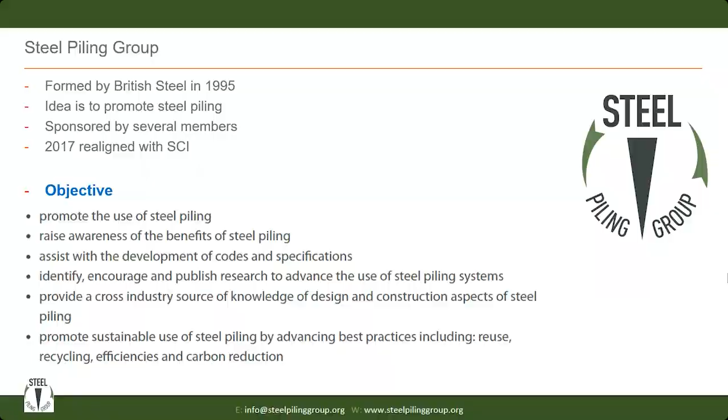Now, on the website, you'll find 6 guidance notes. These are really helpful, practical, down-to-earth guidance notes on topics that are frequently cause for questions. The Steel Piling Group has 13 sponsors, who might be plant manufacturers, material suppliers, or contractors, and we're grateful for the sponsorship of this group.

I'll just finish off by showing you a couple of our recent publications. P308, Specifier's Guide to Steel Piling, is our newest publication from last year, giving a very broad overview of essential topics to do with steel piling. Broadly speaking, our webinar today will be based on the topics covered in this publication, and you've got a free copy. The other publication is an earlier one, Durability of Steel Piles, which came out in 2019 and gives the latest understanding and guidance on how to be confident in the durability of steel piling. That is also freely downloadable from the Steel Piling Group website.

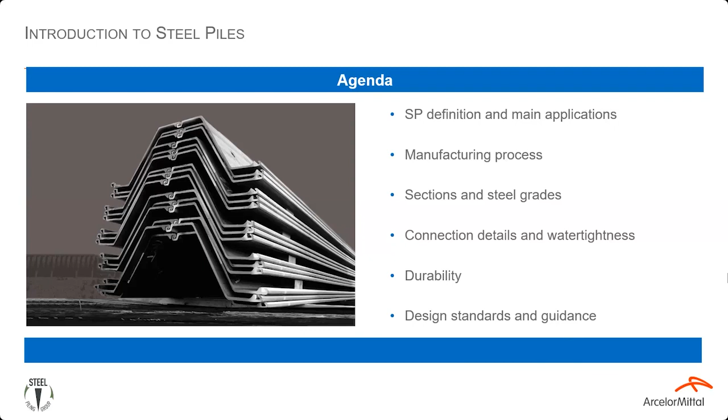So if we have a look at our topics for today, we'll look at what a steel pile is, how we make them, and a couple of steel grades and how we make those as well, and some connection details. We'll talk about durability, and I'll give you some information on design standards as well.

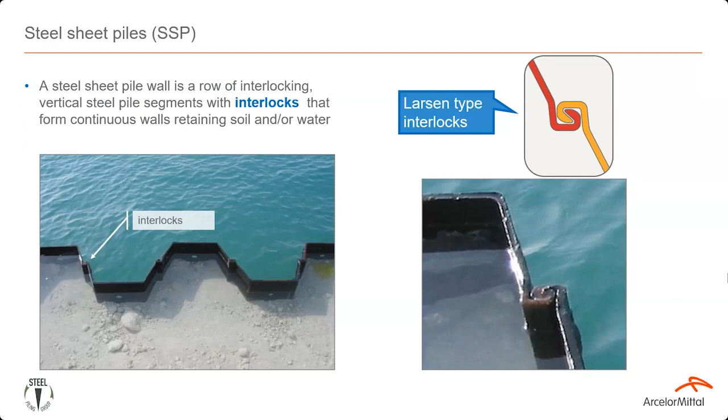So what is a sheet pile wall? It is simply the vertical interlocking of sheet pile segments. If we're looking at hot rolled sheet piles, these conform to EN 10248 standards, where the interlocks are key. These are fully formed, so when you connect the piles together, the wall will act as a single unit, such that shear can transfer across the wall. This is what we define as a structural wall.

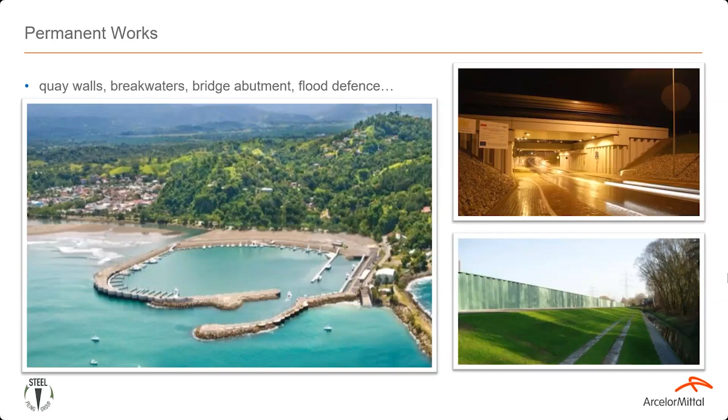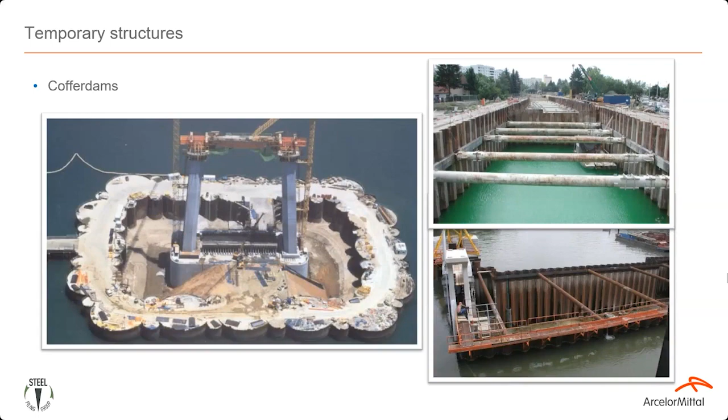So at the larger end, we've got marine structures. This would be permanent works such as breakwaters or quay walls. We've also got land-based structures such as bridge abutments and flood defense walls. And we can also see them used as temporary structures, such as cofferdams on land or in water.

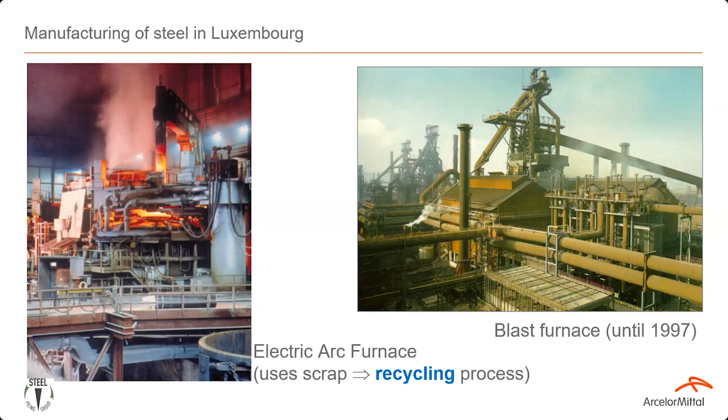Now, the manufacturing process itself is not an easy task, but because of the many processes that the steel has to go through, steel actually gets better with time. The traditional way of making steel is through the blast furnace method, but with this method, temperatures have to stay up all the time, and we also need a lot of resources to make the steel. So in 1997, we shifted to the more efficient electric arc furnace method. This method uses scrap material, making it a recycling process, and it also uses electricity, so it has much less carbon footprint for the piles.

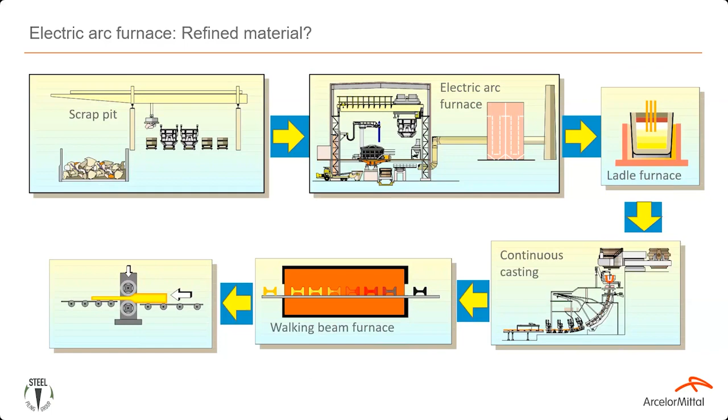Now, if we have a look at the electric arc furnace method: steel will go into an electric arc furnace using scrap material, and then through many processes it will liquefy the steel, and we pour it into a continuous casting system where it gets shaped into a beam, and using a water-cooled interior, we cut it into shape.

From the previous slide, I mentioned we shape them into beams, and there are two reasons for that. First, it's easy to store them this way. Second, they are ready to get formed into shape.

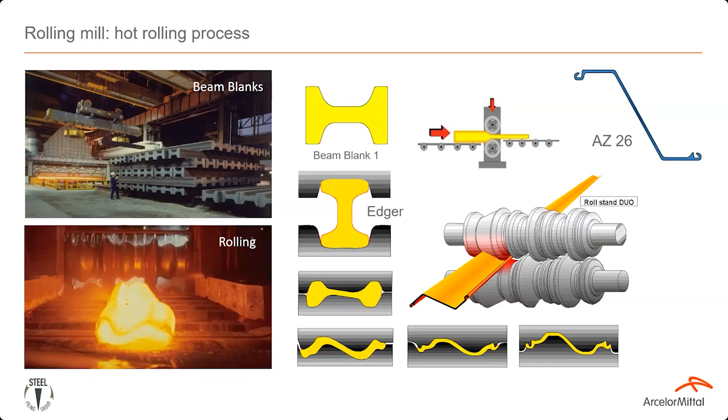At the rolling mill, the piles go through 4 different rolling stands, and the interlocks are the last to be formed, because they are complex and have to connect to other sheet pile sections. So the tolerances are very critical. One thing to take from this is that all the sheet pile sections from us will be able to connect to each other.

Sheet piles are measured through the elastic section modulus per meter run of wall. The higher the modulus, the stronger the section.

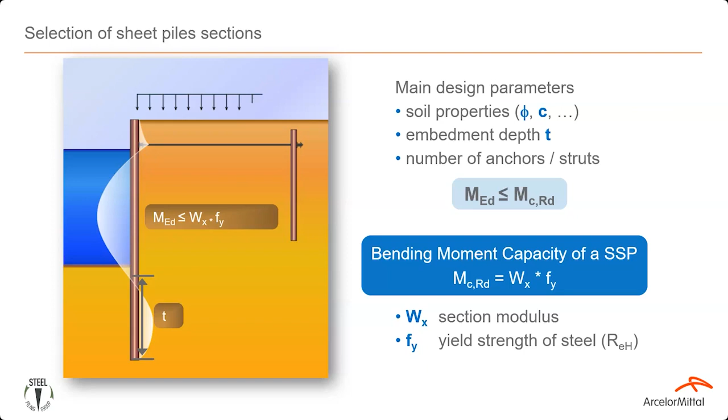When designing sheet piles, we look at both the geotechnical design and the structural aspect. For the geotechnical design, we look at the soil properties and variables relating to the depth of the piles, such as the CU value, the phi angle, and so on. This gives us a bending moment profile so we can calculate whether we need a cantilever wall solution or some type of combi wall system.

The piles are named simply based on their shape. In our general catalog, there are 4 different pages giving you the sheet pile sections, so there's quite a lot to choose from.

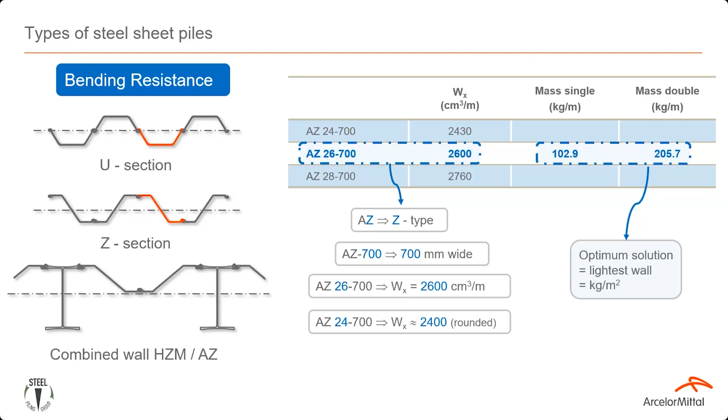If you look at one of the piles, for example an AZ 26700, A is for ArcelorMittal, Z is the shape, and 26 is the key number, which means the section modulus, usually rounded to the nearest 100. This also gives you an indication of the strength of the pile.

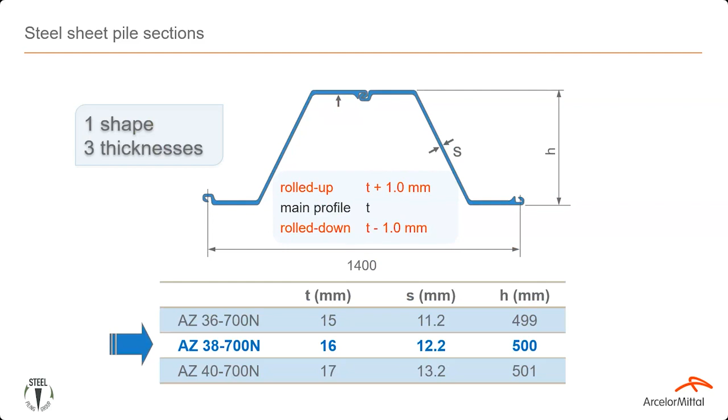The piles come in families of 3 or 4. For example, for an AZ 38700N, we can roll 1 mil thicker and get a 40700N, or roll 1 mil thinner and get a 36700N. N is just short for new, meaning it's our latest addition.

We also have U piles, which are quite popular, including GUs and PUs. Many of these piles are actually the exact same, they simply come from 2 different mills. The GUs come from Poland, and the PUs come from Luxembourg.

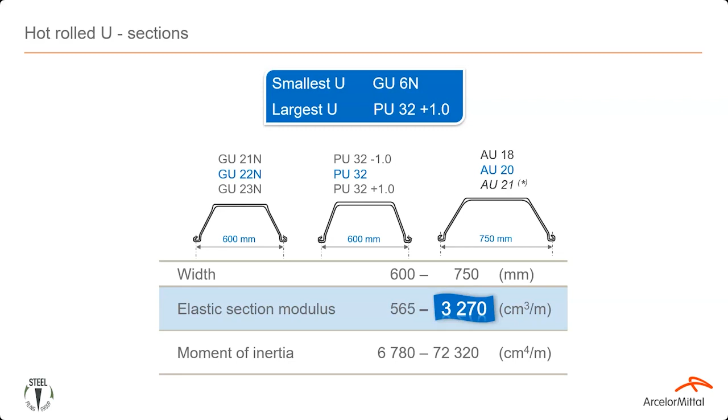We also produce AU piles, which are actually quite more efficient and are in production as well. But many contractors still prefer the GUs and PUs because they have the experience and equipment for installing those, so they tend to use those a lot.

With the interlocks, all of our piles have the Larsen interlocks, which means they can all be connected together. You can connect a Z pile to a U pile section, and you can also connect to an existing sheet pile wall if the interlock is free and available.

Looking at the free corners, such as the C14, Omega 18, and Delta 13, these are mechanical interlocks, meaning you can connect them on a sheet pile interlock and achieve a specific angle deviation as listed.

If you need something more specific, we can suggest the C9 section. It's more adaptable - you can weld it at any point on the sheet pile and at any angle, achieving any tricky angle deviation, say 20 degrees for instance.

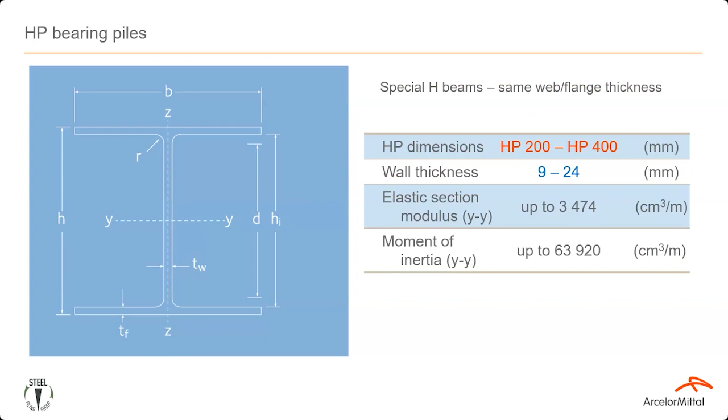Then we've got HP bearing piles as well. You can get dimensions from 200 mil to 400 mil, and often find those with wall thicknesses of between 9 and 24. They're quite useful if you have a key wall system and things like that.

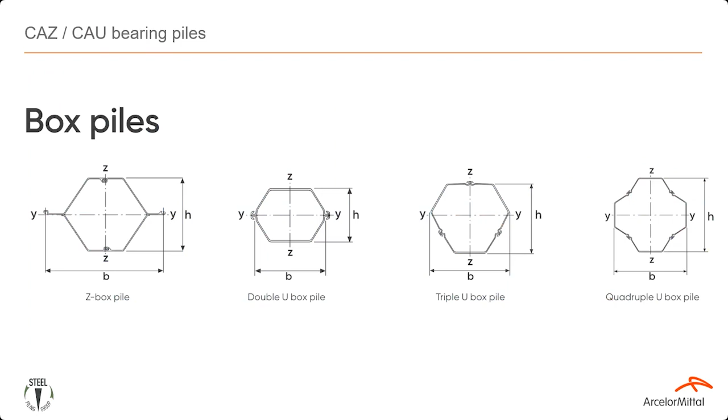Then we've got box piles as well, also bearing piles. You can weld 2 or more different sections together to make box piles. These can be installed in the ground as open box piles, and once installed, you can use them as dolphins and things like that.

Then we've got bearing combi wall systems as well. The HZM system is quite useful, and these are usually for marine environments.

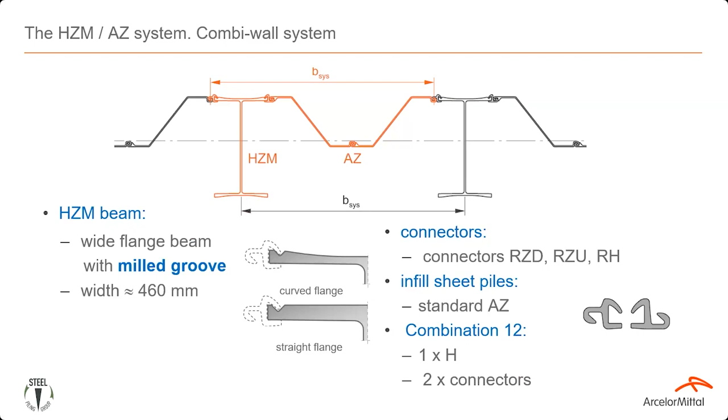If you look at the H-beam on these piles, they actually have a much thicker flange than regular H-beams. We have to mill a groove on the H piles to be able to connect a connector to those, and then we can connect Z piles to those ones.

Now, for most of your piles, you'd be looking at EN 10248 standards. And within the standard, we can go from S240 to S500. But as a company, we've increased our benchmark to S355 or higher, as there's no cost benefit to producing the lower grades anymore. And you'll also notice there's S460 and S500 on this slide.

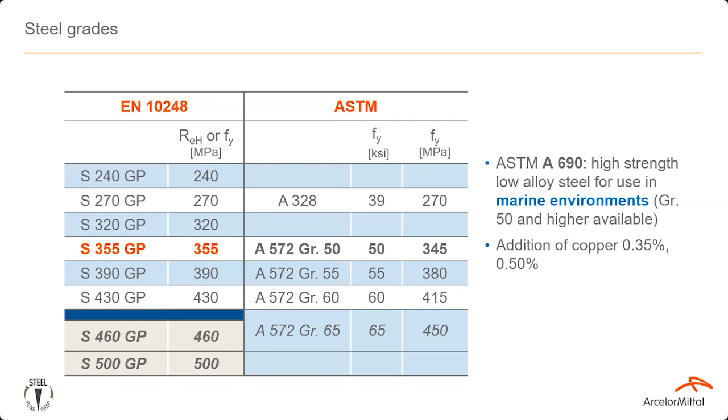This has been introduced last year, September 2023. We have been producing S460 from a while ago, so these are available. And S500, speak to us if you would like to do those as well. We can also make piles to different standards as well. If you're designing to ASTM method, Chinese, Japanese, that's easy to be done as well.

Now, of course, there is an optimum solution. If you're designing with sheet piles, say you need a bending moment capacity of around 1500, and you've got 4 different pile sections using 4 different steel grade. Now, as a rule of thumb, always go for the highest steel grade. It's always more efficient, but maybe 2 things that you need to check.

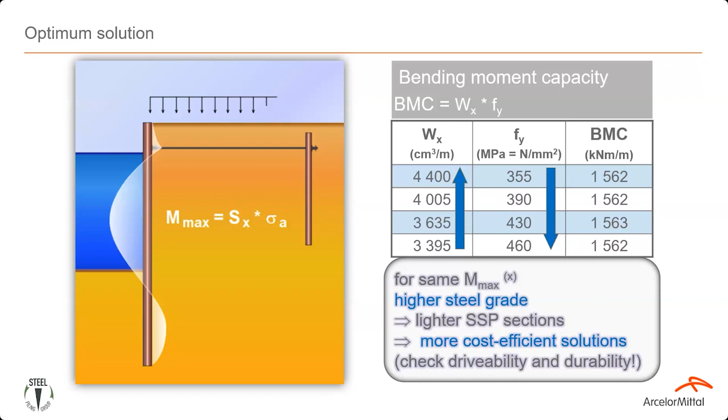Check that you're not installing something that's too thin, as when you're using a higher steel grade, you're also using a thinner sheet pile section, and maybe also check your durability, because you need to check that you're not installing something that's too thin over the lifetime of your sheet pile.

So sheet piles, there's various ways to avoid corrosion, and sheet piles will corrode when in contact with water and oxygen together. So you've got to protect them. And one way to do that is through sacrificial thickness.

And if you look at the UK National Annex, it'll give you two tables to account for these losses. And you can also look at some other factors. If you look at a higher steel grade, now this is just protection at the end of life, and it will give you a higher bending moment resistance, but you will still have to use some kind of corrosion protection.

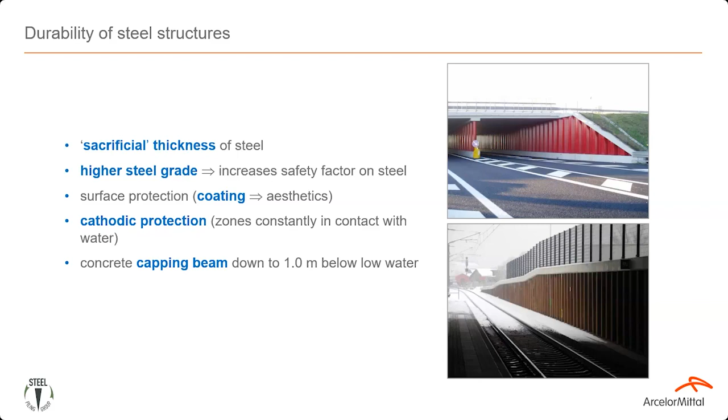For instance, you can also coat the piles, and this is very often done for aesthetic purposes. And you can also use a concrete capping beam. Now, this can sometimes be used at road level, where it serves essentially for 2 purposes. One, it protects against crush, it protects as a crush barrier, or it also protects against salt spray.

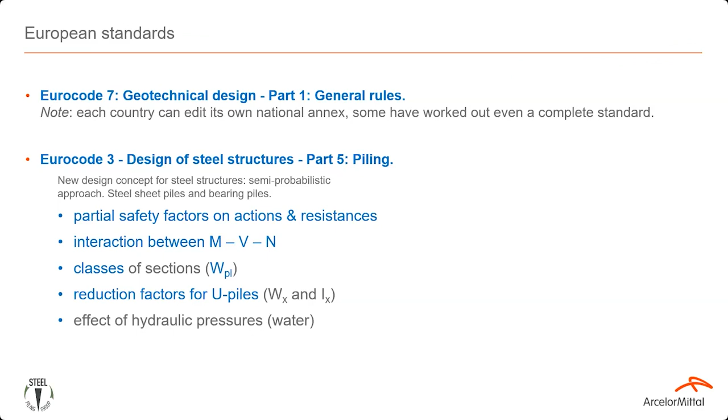Now, as I've mentioned before, we've got 2 designs for this, for the sheet piles. So essentially we've got EC7 Part 1, so this would be for the geotechnical design. And then we've also got EC3 Part 5 for the design of steel structures.

Now, for most of your projects, you'd be looking at designing for a bending moment resistance to a class 2 or 3. And these equations will help you with those design. But if you're designing to a class 4, local buckling is a possibility. And one other thing, you'll have to do a lot of different calculations and a lot of searches to be able to get the piles to work.

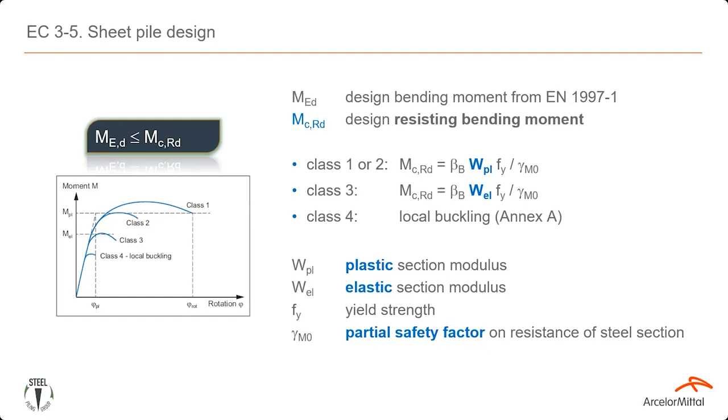And worst thing is sometimes the pile may not work with a class 4. So it could be useful to try and get your steel to a class 2 or a class 3 for this one.

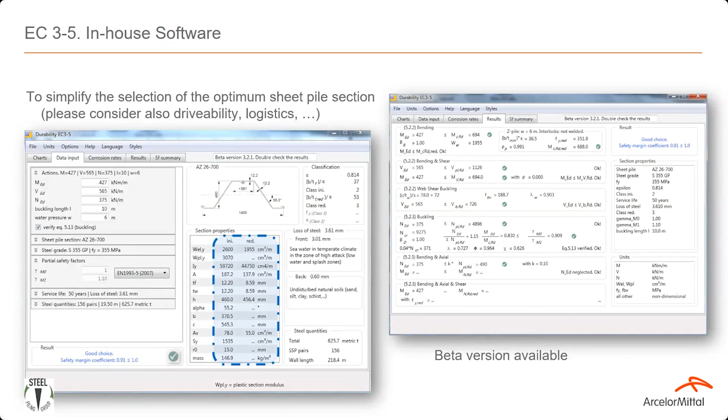Now we've got some durability software. This one is free to download on our website, and you can have a look through those. And to give you an example with this one, you just have to include the steel grade, the sheet pile section that you're using, and then the software itself will calculate the losses for you, and it will give you your results for bending, buckling, and even axial forces, shear resistance as well.

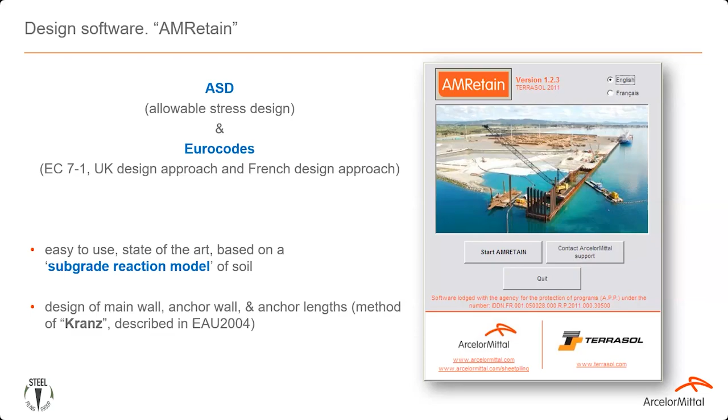This is also one of our softwares, AMRetain. For most of our projects, we usually use AMRetain, and then we cross-check them with other software packages such as WALLAP or ReWaRD. One thing that this one does over other software packages is that it will calculate for double wall solutions, and it will calculate all the solutions with a subgrade reaction model, and all of those information will be calculated to Eurocodes. So it's quite useful if you want to have a look through that as well. But this one is available on request. It has been developed by Arcelor.

Now, when it comes to steel itself, it's fully impermeable. The only way that water can get through is through the interlock. There are various ways that you can seal those.

If you have a water pressure of less than 1 bar, then you can look at something like a Beltan Plus or Arcoseal, and it will seal the interlock, making it watertight.

And if you have a water pressure of less than 2 bar, then I suggest you have a look through Roxan Plus. This is a water swelling product, and it can take up to 2 hours to start swelling up.

And if you need something higher than that, we've got the Akila. This one is useful for water pressures of 3 bar, and it works as a compressive filler. It's got a three-lip system, and when these piles are connected, the wall will act in compression and completely make the piles watertight.

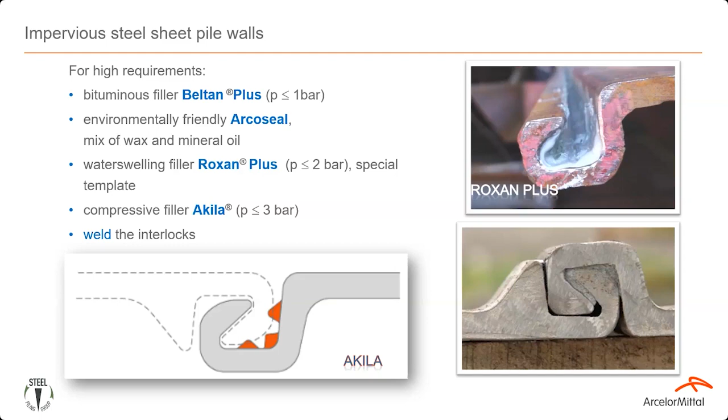And if you need full water tightness, then welding the piles can be an option. You can weld the piles fully. Every double pile, you can weld them fully at the mill. And on site, you can weld at every other interlock down to the formation level.

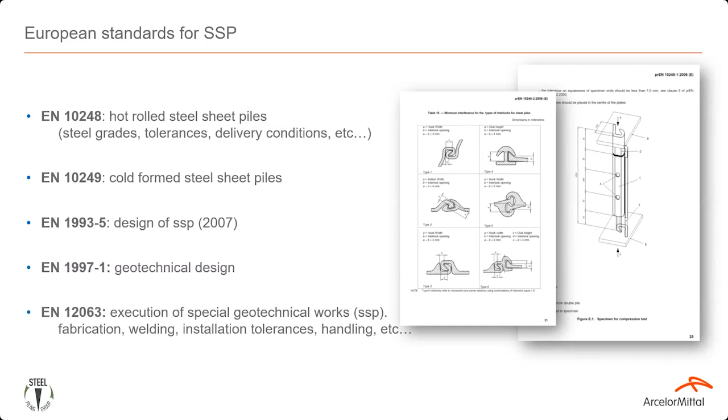Of course, we've got some literature for you. This is a list that applies mostly for your design. We've got EN 10248, EN 10249, and EC3 Part 5 for the design of steel piles. We've got EC7 Part 1 for the geotechnical design, and also EN 12063, which is very good for the execution of special geotechnical works.

So, to conclude, we have seen sheet piles and steel piles as temporary and permanent solutions. We have seen them as combi wall systems. We have seen the durability of steel piles and how sacrificial thickness is one of the most cost-effective solutions. We have seen some optimum solutions for how you can optimize your sheet piles, and we have also seen some watertight solutions.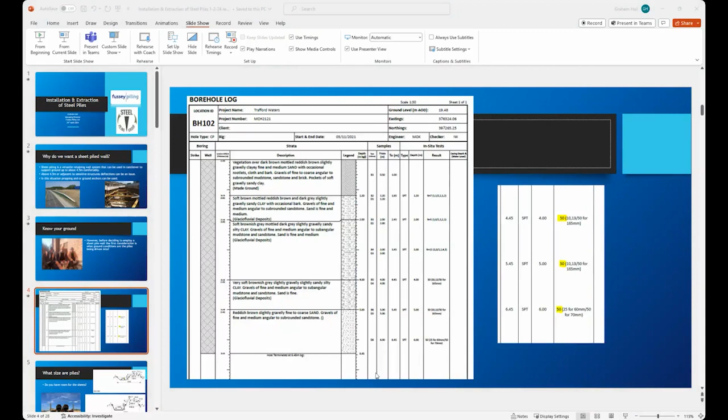A brief example: this was the job at Trafford Waters in Manchester, and they wanted a hole in the ground about 5 meters deep, just using sheet piles in cantilever. However, part of the issue was effectively, if one looks at the N values of the soils at 4.45, 5.45, effectively it's refusal with N values of 50.

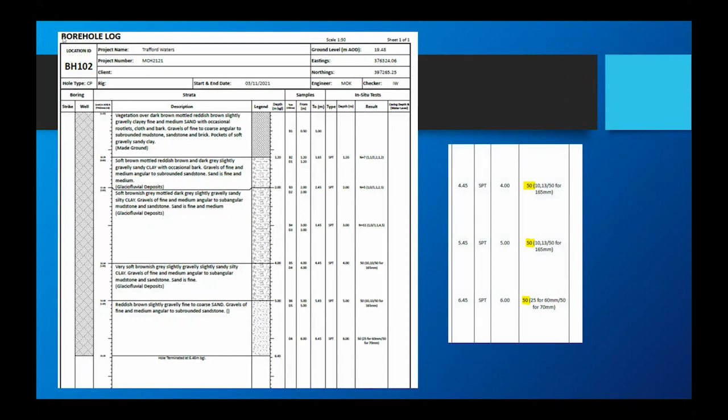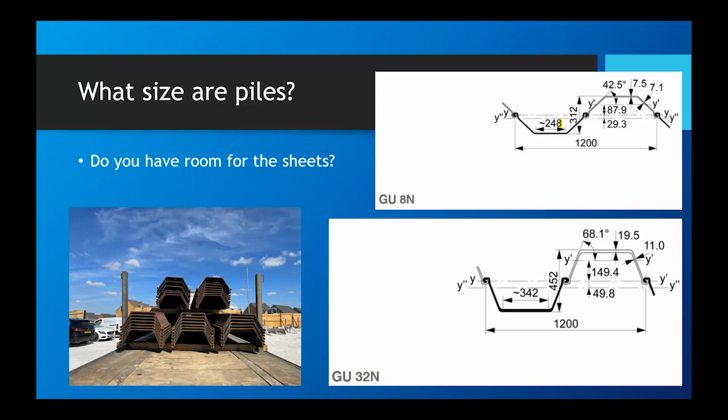So what size are sheet piles? As Jess discussed earlier, you need to make sure you've got sufficient room on site. From the lightest pile sections, the piles are 312 millimeters deep, up to the heaviest U sections at 452. So one needs to allow a 400 to 450 millimeter sheet pile zone in which the piles can be installed. We often see just 100 mil of sheet piling zone because people think of them just in terms of trench sheets rather than heavy duty sheet piles.

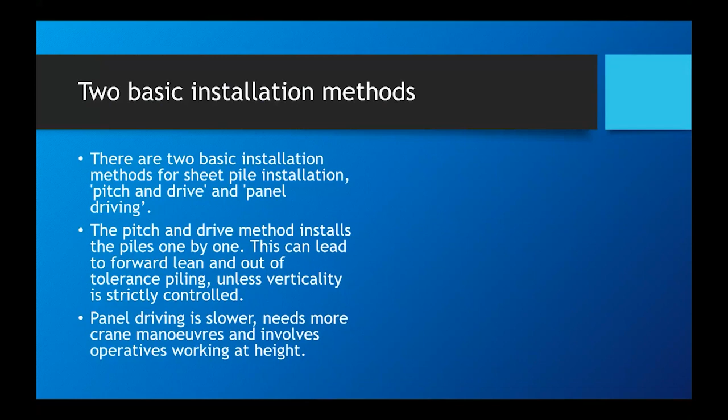In terms of installation methods, there are two basic installation methods: pitch and drive and panel driving. The pitch and drive installs the piles one by one. This can lead to a bit of forward lean of the piles and some out of tolerance unless you're controlling the verticality as you're driving them. Panel driving, a more traditional technique, is slower and needs more crane maneuvering and involves operatives working at height.

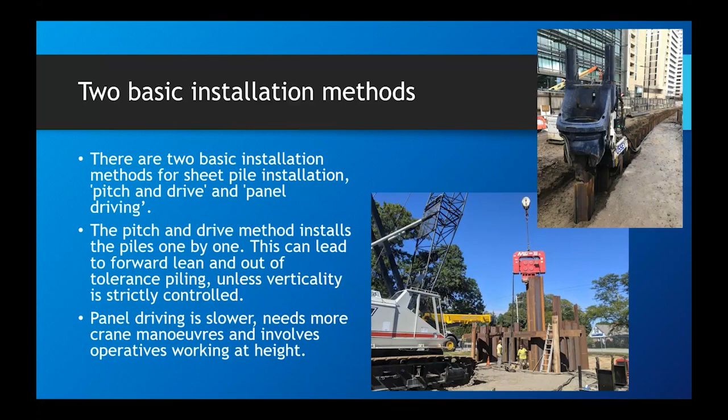The main considerations are the soil conditions, the sheet pile sections and length, and driving equipment, as well as whether the sheet piles are designed to be permanent or temporary. If the wall is going to be visible, you might want to paint them for aesthetics, or leave a lovely stock rusty colour. Installation tolerances are very important in terms of vertical position and alignment, and as discussed earlier, interlock sealant systems can be used to make the piles impermeable.

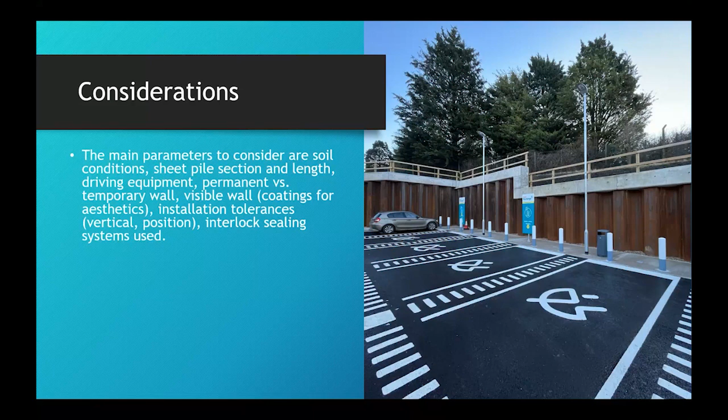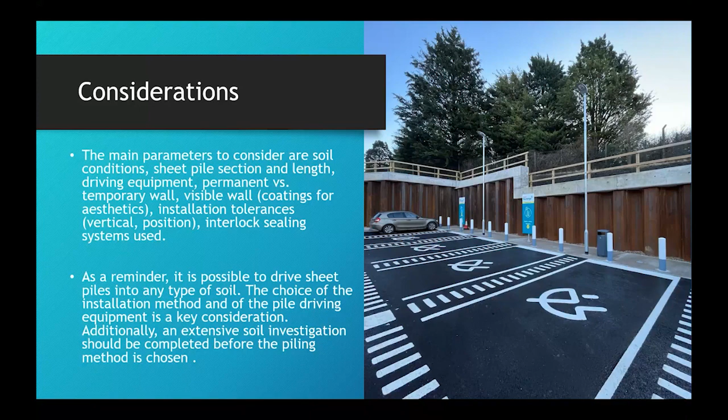As a reminder, it's possible to drive sheet piles into pretty much any soil type, but the choice of installation method is key for the pile driving equipment. An extensive soil investigation should be completed before the piling method is chosen. My old geotechnics lecturer used to say, you pay for a ground investigation whether you have one or not.

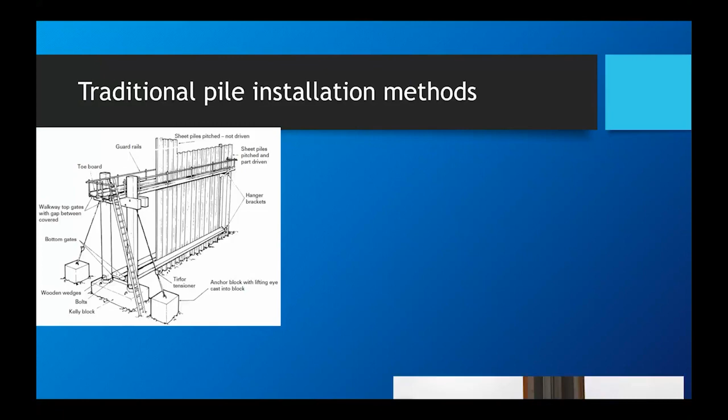Talking about traditional piling installation methods, still used a lot in the marine environment, this is what we call a Kelly block setup, where you set up a frame and the sheet piles are interlocked into them. These are called piling gates, and they're good for ensuring the alignment of longer piles.

When constructing sheet piles by what's called panel driving, you set up the gates, install the first two piles and drive those down. You then fill the gates up with the remaining piles, drive down the last pair to keep the piles straight and plumb, and then drive the remaining piles back to the top gate level. You can then shift the gate left or right depending on the direction of construction.

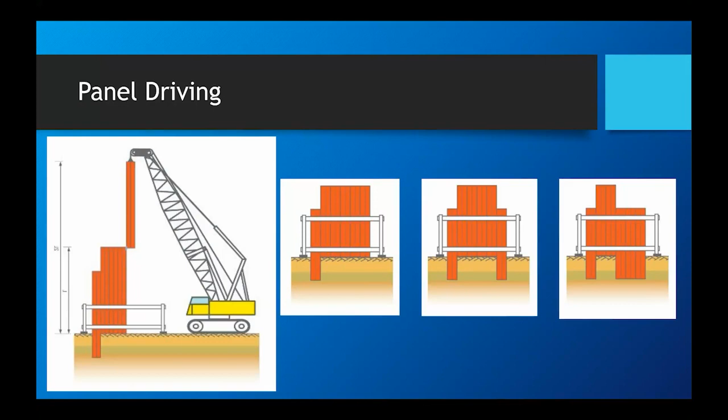Crane suspended equipment, the traditional stuff, is used to drive the piles in sequence, but noise and vibration must be considered when using this equipment. Here we can see a piling vibrator hanging off a traditional lattice boom jib crawler crane.

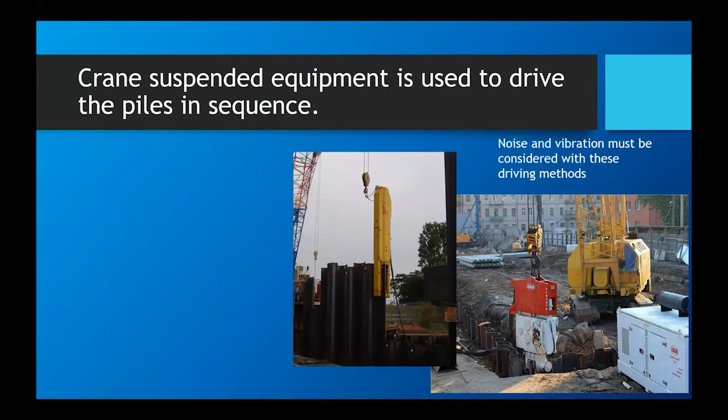Here is a BSP hammer. Notice the legs extending down, again crane suspended, with the yellow legs extending down beyond the top of the piles to keep the pile driven straight. And again, traditional piling gates in a marine environment with a Dawson hammer there.

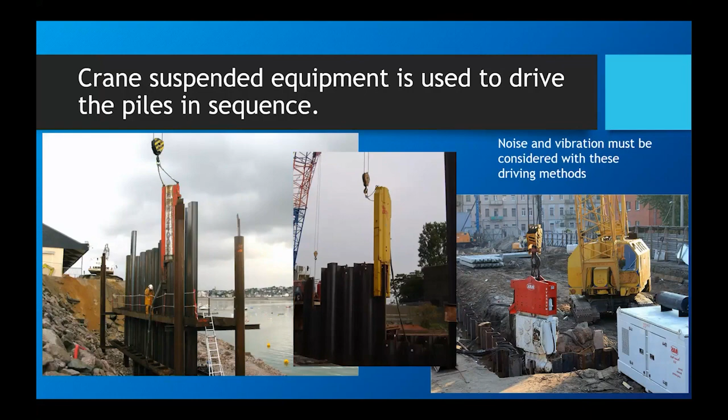Starting at the bottom end, really at the lowest level, an excavator mounted vibrator can drive the lightest sheet piles and trench sheets into the ground. The size of the vibrator and excavator must be considered relative to the ground conditions and the type and length of sheet pile to be installed.

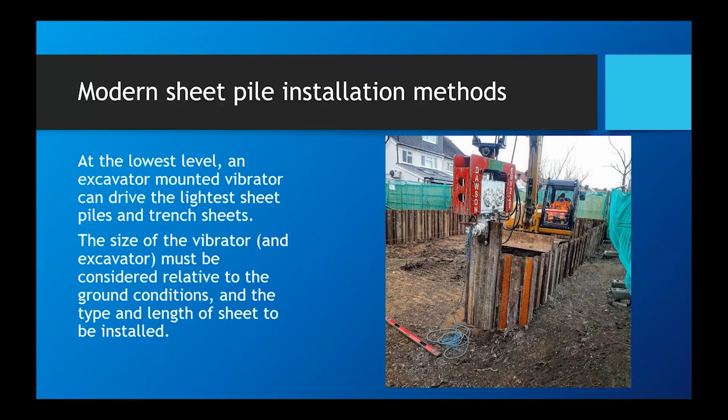It's okay for driving into granular soils, but not very good for driving into cohesive material.

You still occasionally, once people have stood piles up with an excavator-mounted machine, see an old air hammer being used. The technology is very, very old. It works, but it's still used in some places, though they do create a lot of noise and you can damage the sheets when driving it.

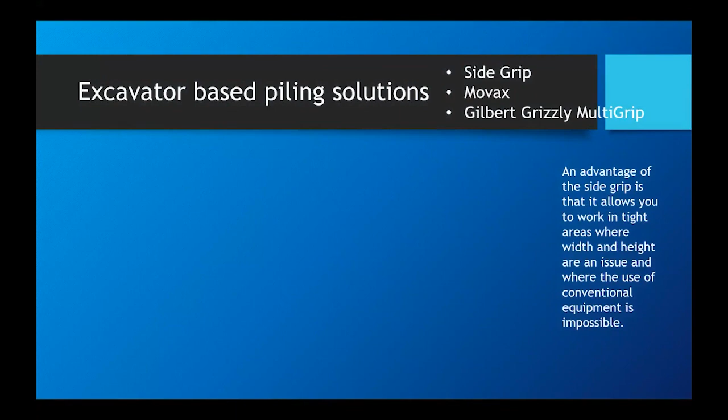Excavator-based piling systems go by trade names like Movax, Side Grip, or Gilbert Grizzly Multi-Grip. The advantage with these systems is that they allow you to work in a tight area where width and height can be an issue, and where conventional cranes and drop hammers are impossible. You can put various attachments on the end of it.

Here, in the middle, we've got a Movax. On the left, we've got a pre-auger attachment fitted to assist with driving, and you can even put a big drop hammer on the end.

What's important with these systems, both as a piling contractor and a steel piling group, is they should be running on a piling mat. You shouldn't just be running them on dirt. These attachments can weigh anything from 4 to 5 tons, swinging around on the end of a 30-ton excavator.

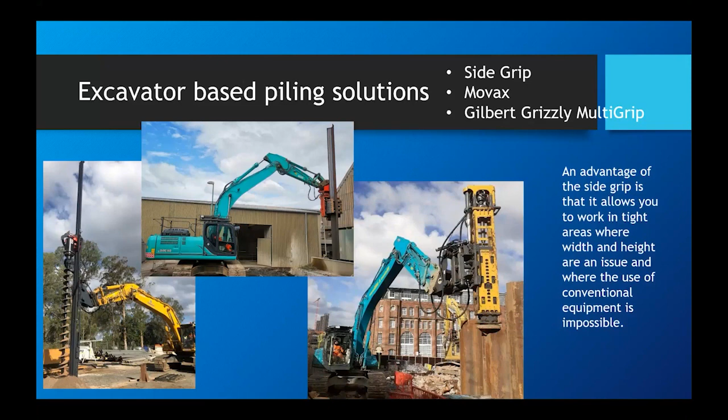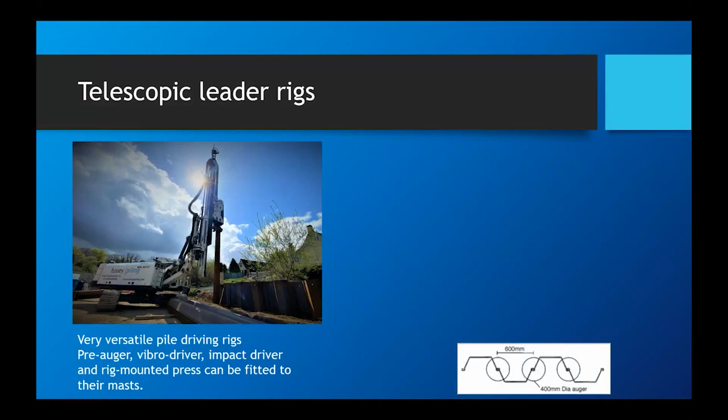Telescopic leader rigs are very versatile. You can change the front end from a vibro-driver, a pre-auger, an impact driver, or even a rig-mounted press. Here's a Bauer RTG showing vibratory piling on the left, and on the right some pre-augering with a nominal 400 diameter auger.

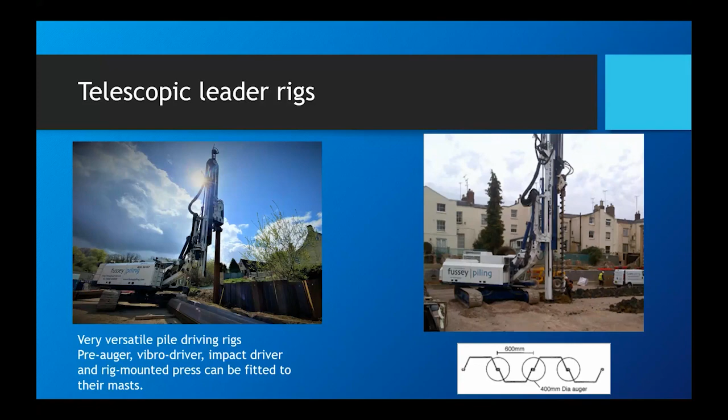With respect to vibratory installation, as a business we tend to use the Bauer RTG 16T leader rigs. Very fast installation, potentially 750 meters squared of piles installed in a week. We tend to drive piles up to about 14 meters, hence the name 16T, though you can drive a 16-meter sheet.

With all these leader rig type systems and modern driving systems, you get low levels of ground-borne vibration and some noise. We would tend not to drive piles closer than about 15 meters to a building, but you take each project on its own merits.

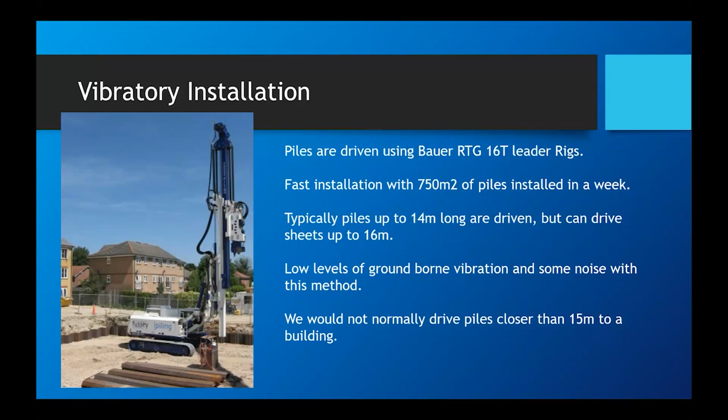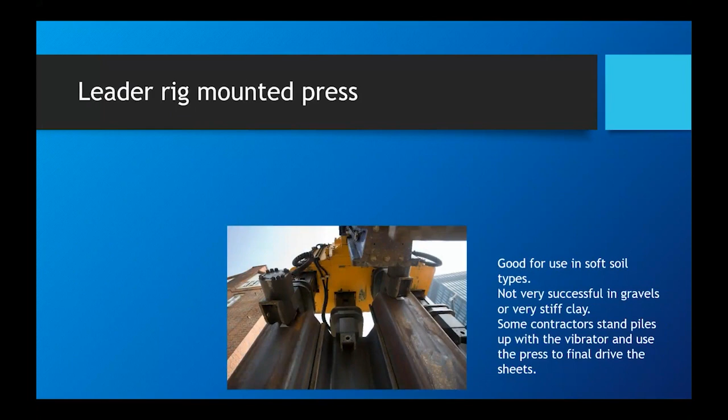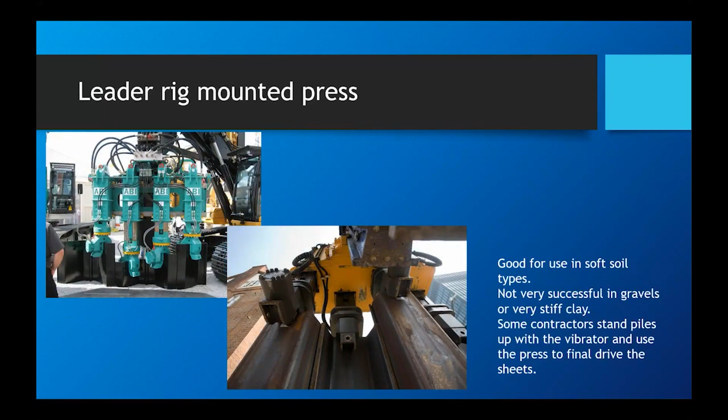Talking about the versatility of the leader rig, there is what's called a leader rig mounted press, or hydro press, made by friends at ABI. This grips hold of 4 piles and pushes them in individually, then lowers the 4 piles down. It's very good in soft ground or cohesive material, but not very good in stiff clay or gravels, just by the nature of the beast.

Some people tend to stand piles up with minimal vibration, and then use this to back drive piles down to level.

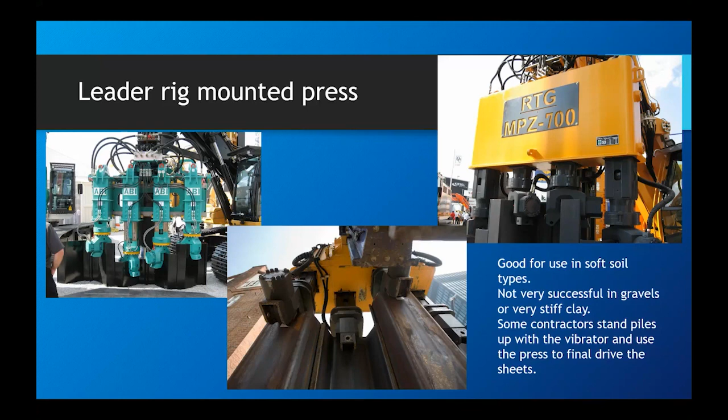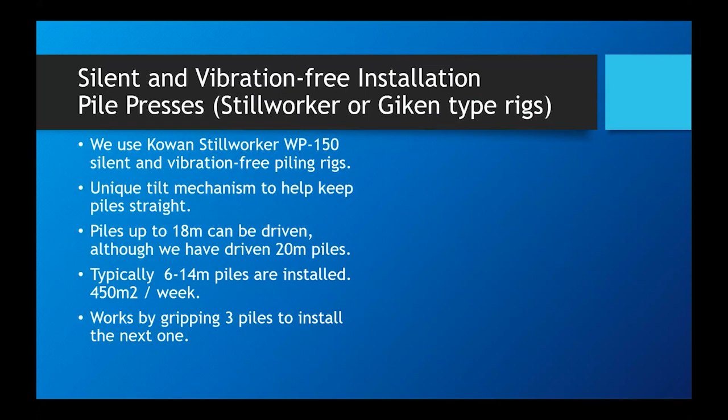Another tool in the box is a silent, vibration-free installation pile press called a Kowan Stillworker or Giken-type rig. As a business, we tend to use the Kowan Stillworker WP150.

The WP150 has a unique tilt mechanism to ensure, as I mentioned at the beginning, with a press and drive method there's a tendency for the piles to creep forward and lean. So using the tilt, you can ensure the piles are always going in plumb.

Piles generally up to about 18 meters can be driven. We've driven 20 meters, and I'm aware of people driving 24-meter long piles with this system. Typically 6 to 14-meter piles are the bread and butter, achieving about 450 square meters of piling in a week.

In terms of pressing force, the WP150 will press up to 150 tons on an individual sheet and will pull up to 160 tons to extract a sheet. It works by sitting on 3 piles to push the next one.

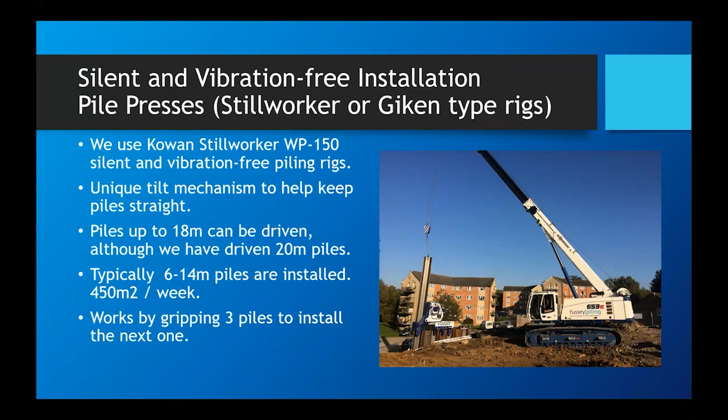But what does that really mean? As you can see here, there are 2 machines sat on the piles. It sits on 3 piles and pushes the next pile all the way down. It then lifts itself up on its carriage, moves forward, sits back down, and pushes that pile all the way home. It repeats this over and over again.

It's as near to a factory-type production method as you're going to get with driving sheet piles - a very, very controlled, safe method. There are probably 30 to 35 units currently in the UK pushing piles in.

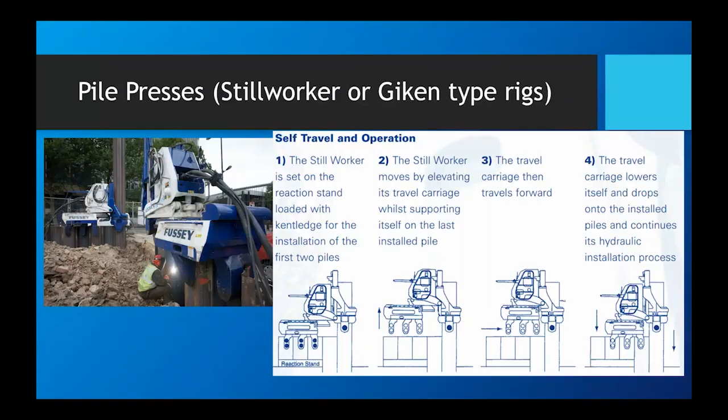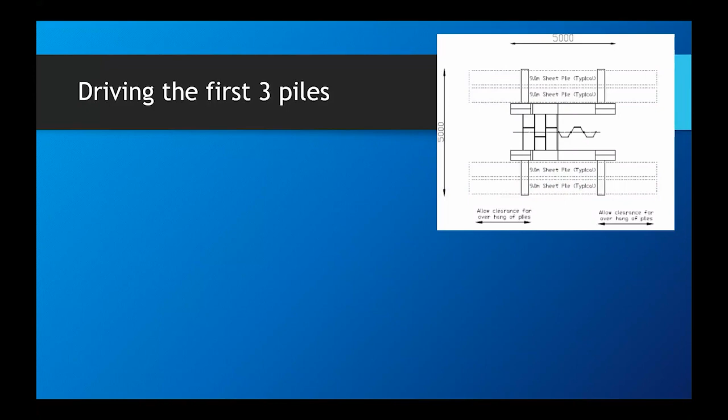The thing with this method, though, is obviously driving the first 3 piles. Some people use a Movax or piling vibrator to drive the first 3 piles, but you've still got noise and vibration in that scenario. We tend to use a reaction stand, which looks a bit like this in section.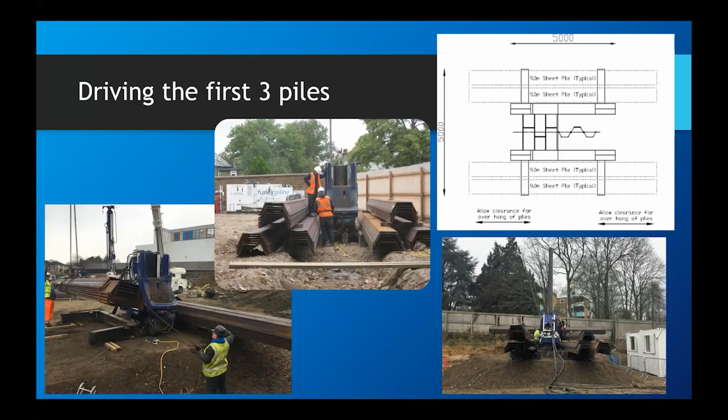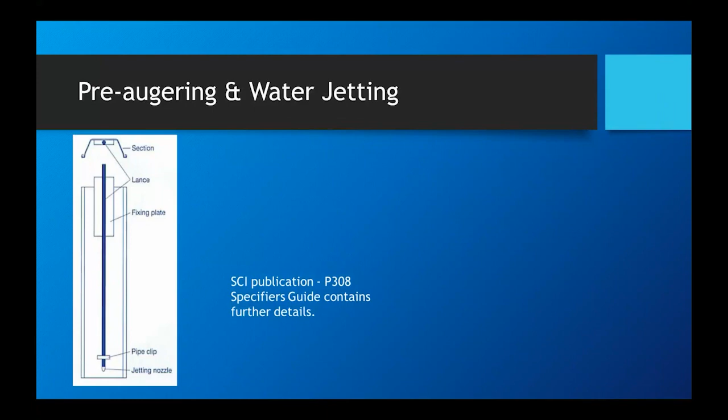In tougher driving conditions, such as dense ground or stiff clays, one can use a combination of pre-augering and/or water jetting to assist in installing the piles. As I mentioned, the SCI publication 308 gives a lot more detail, but you can see on this particular site in Southwark, where you've got dense gravels overlying London clay, we pre-augered with a 400 diameter auger at 600 centres all the way around to facilitate driving the piles. Other people may well water jet to achieve the same.

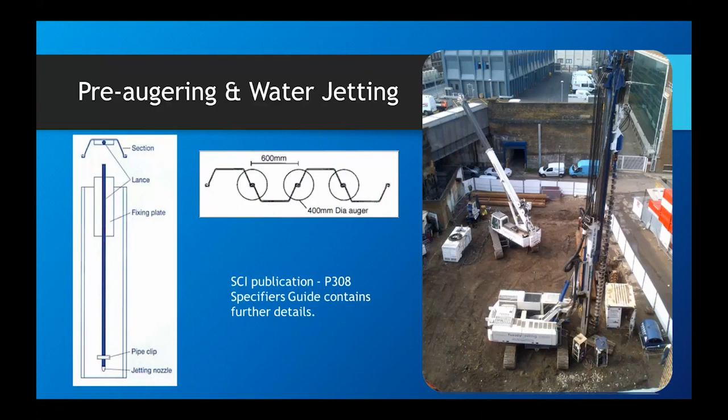When you've got really tough ground conditions, you can get a real beast of a machine called the Giken Supercrush. What that does is use a rock auger housed inside a casing to penetrate the hard ground. As you advance the pile, the auger removes some of the soil, enabling silent piling into very hard ground and rock. Production's not rapid with these systems, but it enables you to get piles into ground that perhaps you wouldn't ordinarily be able to.

Interestingly, I understand the minimum pile section for this would be a 7-meter long GU27, which is quite a heavy pile for that length. But you can drive piles in pairs, as ArcelorMittal's heaviest section, the AZ50, up to 24.5 meters, with a different type of Supercrush. These machines are quite heavy though - the single press weighs 16 tons and the double Z press weighs up to 27 tons, so you need some serious craneage to move this equipment around the site. But in the right ground, in the right conditions, it's a useful tool.

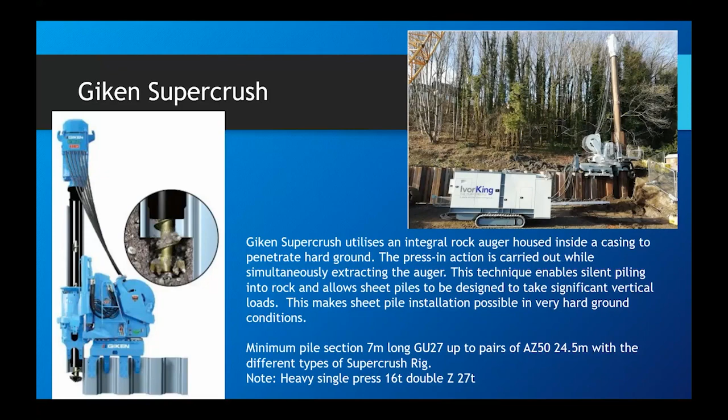Now, once you put all the piles in, sheet piles are very useful as temporary works, and so you often want to pull the piles back out again.

That can be completed with a piling extractor vibrator that can be crane suspended or mounted as a leader rig, or alternatively, which we tend to do, is we use a pile press, and that avoids the need for anybody to be working above ground level. It's also obviously a silent and vibration-free method of pulling the piles.

Again, with the Still Worker, it grips on the tops of the piles and takes out each sheet one by one.

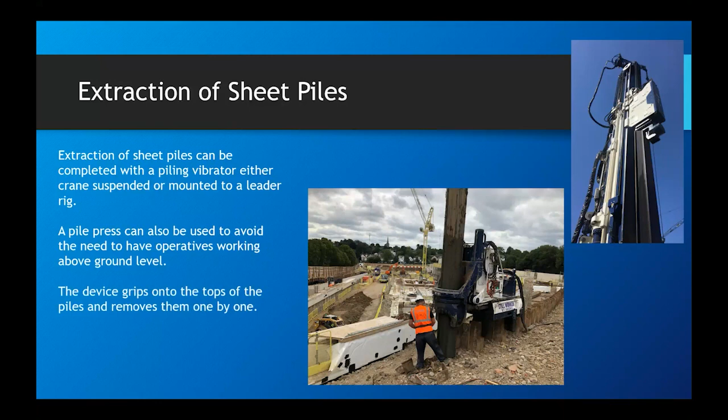Now, noise and vibration, as I mentioned previously, is a big consideration when driving sheet piles. This table is taken from the SCI publication 308, and you can see on the right-hand side typical noise levels at 10 meters. Obviously, if you're closer than 10 meters, the noise level can be considerably louder. This also needs to be considered within the context of the site — if you're working next to a noisy motorway, will the piling operations actually be greater than the adjacent noise?

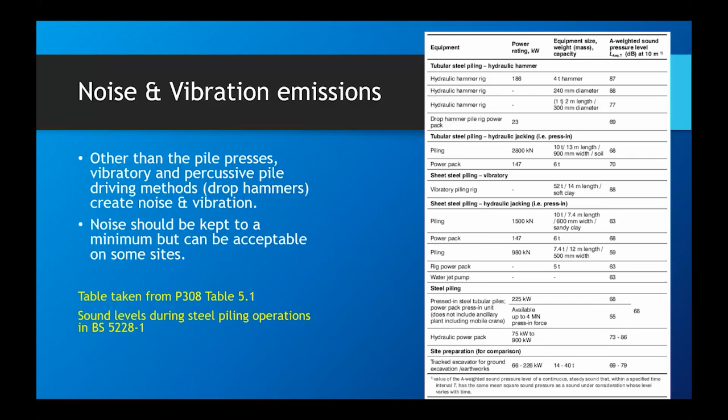And vibration, again, a very big hot topic when installing piles. This is an empirical formula that we use to give a bit of guidance. Looking at the graph, you can see at distance, typical vibration levels can be very high close to the piles, but it dissipates very, very rapidly.

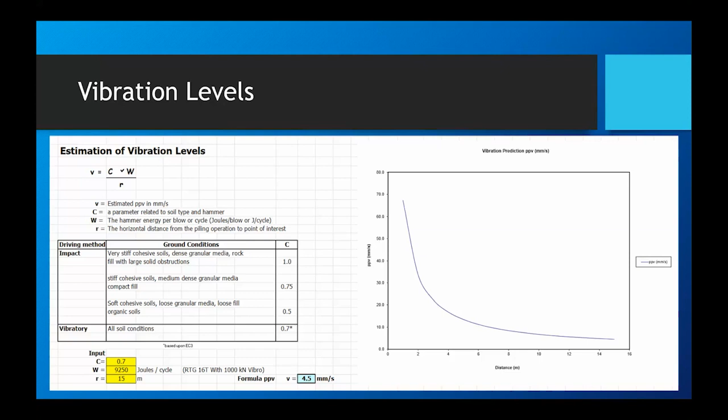And again, if vibration is a problem, such as working adjacent to a water main, a gas main, or some other sensitive structure or utility, it's always worth getting background readings before the piling equipment arrives on site, because sometimes you find the background readings are greater than the limits you're trying not to exceed.

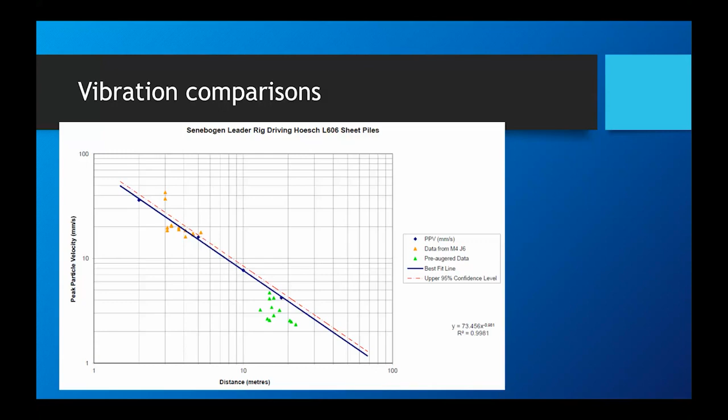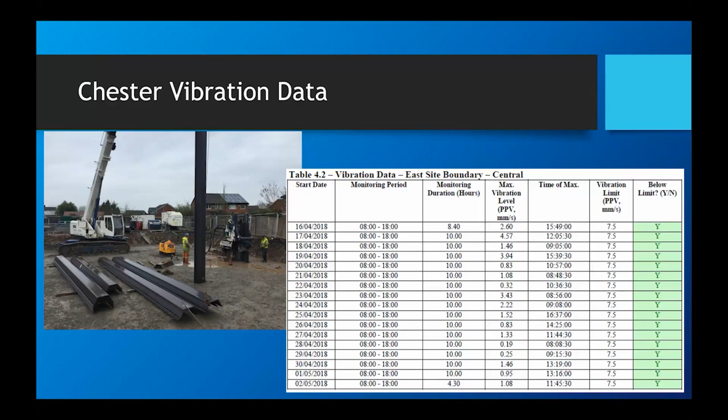So a few final thoughts and conclusions. Are sheet piles suitable for what you want? Is the retain height reasonable for sheet piles — up to 4.5 meters, or propped, or excessive deflections above 4.5 meters? What are the ground conditions? Have you allowed enough room for the piling element? Have you allowed enough room for the pile driving equipment? Is noise and vibration an issue?

Does the layout work in whole piles? Engineers have a habit of not designing schemes to allow for whole piles and just assume one can make a lot of specials — that really doesn't happen very often. And have you allowed for deflection and tolerances? Sheet piles are a flexible retaining wall, so you will get deflections when the piles are installed.

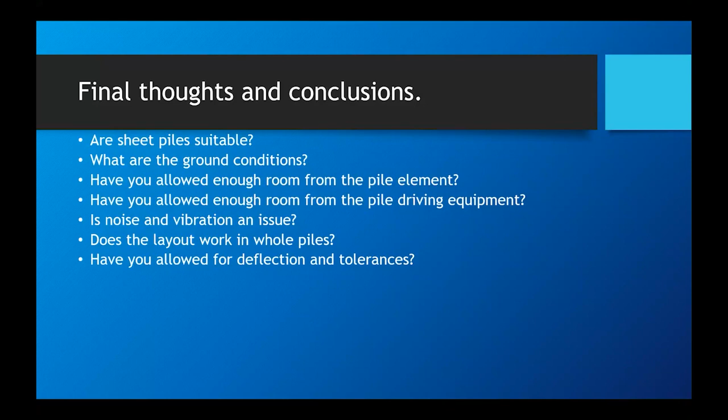So in summary, sheet piling is a successful temporary or permanent retaining wall that can be installed in a wide range of site conditions through the selection of appropriate equipment and methods.

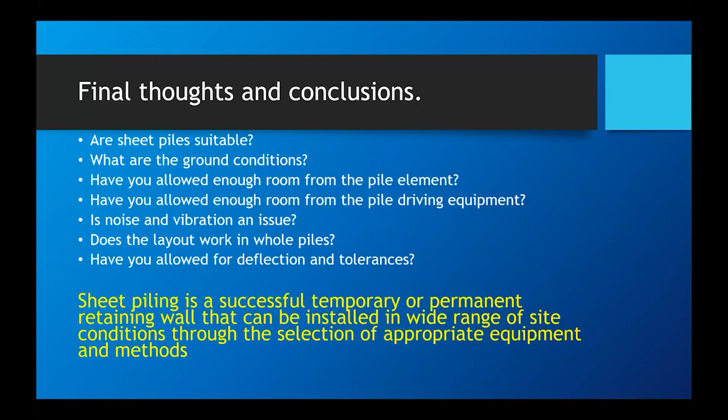Thank you very much, Graham. That was great. We're now going to have 10 or so minutes of questions. So if Jess could join us back. Most of the questions coming through so far are for Graham, but let's start off with that question we had earlier on.

How is the longitudinal shear transmitted and checked with the joint interlock according to the national annex? So I think that's a question for Jess. Sorry, would you repeat the question again, please? How is the longitudinal shear transmitted and checked with the joint interlock according to the national annex?

It's quite a difficult question, to be honest, so I'm going to have to send some information back to you. That's okay — we'll answer that by email.

Let's go to one of the slides Graham showed. Graham, hello — do the 16 to 20 metre sheet piles require anchors? So the sheet piled wall, more than probably... Generally, pile retained heights up to about 4.5 meters would be cantilever. Beyond 4.5 meters, depending on the site, you would tend to be propped or anchored in some way, either single or multiple props.